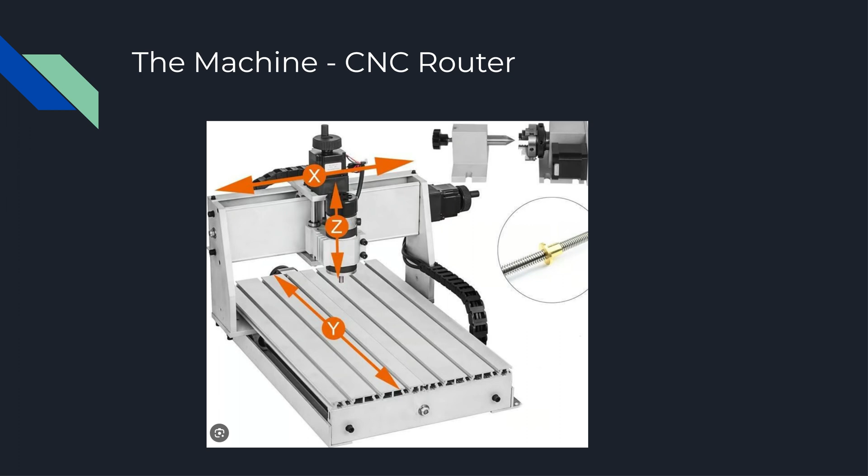We use our Shapeoko CNC routers for a lot of training purposes, as they're easy to use, durable, and relatively robust, and they can work with material up to 23 by 18 inches. We even have the large CNC router, which will work with material up to 4 by 8 feet, as well as various other metal types of mills that are more rigid for cutting harder metals like steels.

Now, for tooling that goes into these machines, the one you're most commonly familiar with is probably known as a drill bit. You probably have used these in drill presses and hand drills. Drill bits are great for making holes, but they're only meant to make holes. They can only be used in up and down cutting motions, and to be absolutely frank, we don't often use them in our routers due to the limited Z travel a router has, and the fact that you can usually get away with just using an end mill.

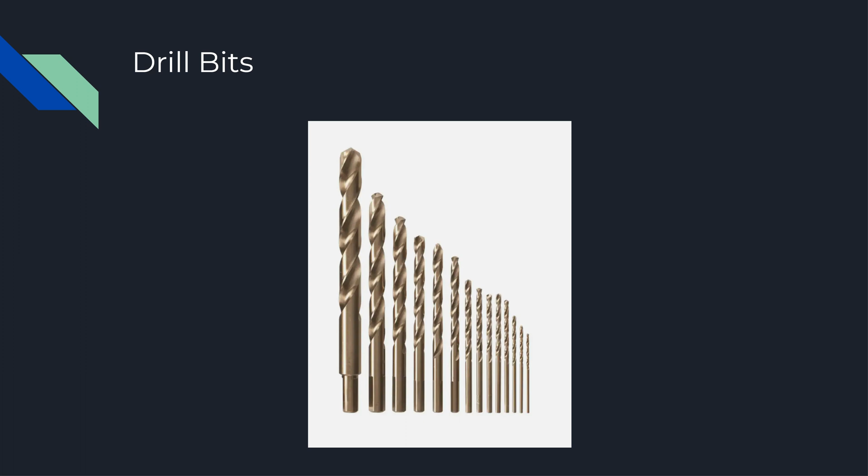And without further ado, end mills are the bread and butter of machining. These are tools that can cut on the sides as well as the bottom face. Now, with end mills, you don't actually want to drill straight down with them. You generally use the CNC machine to make a helical move that bores into your part. Afterwards, the end mill can be pushed around and then used as a side cutting tool.

Now, end mills come in all kinds of different shapes, diameters, and lengths. The most common ones are probably these square tipped ones, where the end cutting flute is perpendicular to the sides. We generally have these in 2, 4, 6, and 8 millimeter cutting tools, and they're generally used for all kinds of different types of cutting. Now, the other most common type are known as ball end mills. These end mills have a half sphere tip and are generally used for 3D surfacing and creating complicated geometrical shapes.

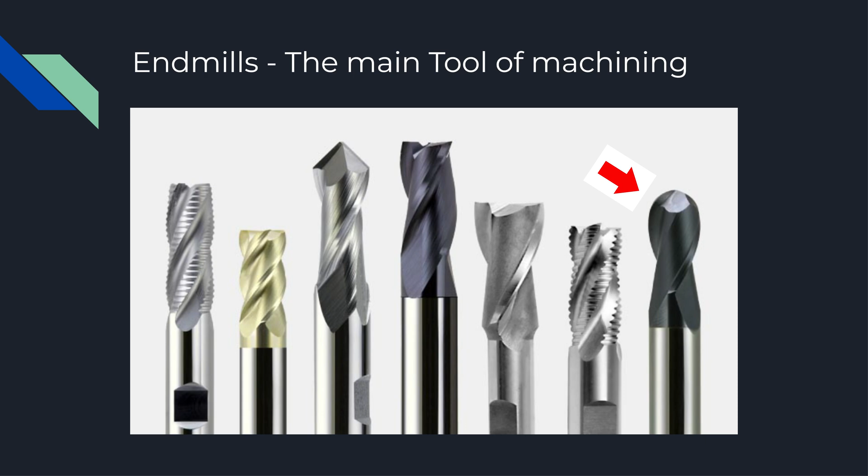Now, when you're designing your parts, you gotta think a little about how you're gonna design the part so that the machine can make it. Unlike a 3D printer, the CNC mill can only cut what the tool can fit in. So that means that when you design a pocket, you have to have an end mill that is small enough to physically fit into the pocket to be able to cut it. You also have to have an end mill that is long enough to cut it.

Most commonly, our end mills will only cut up to an inch deep. So if you need to cut a pocket deeper than that, you're going to have to get creative with the tool path or buy a larger tool. Now, you can usually solve most of these problems with money. Tools that are not of standard length or sizes get very expensive very quickly. Also, when you're cutting a pocket, you cannot have any sharp corners, because the end mill is round, so all of your corners at minimum will have a radius of the tool size.

You also want to think about the rigidity of the tool, as there's a lot of cutting forces and part of the tool is cutting through different materials. Because everything moves under high load, you want to make sure you're using the shortest end mill for your cut, and then you also got to realize that the smaller end mills are much more likely to break.

I've used end mills as small as 0.5 millimeter, and they snap if you look at them wrong. So for the most part, you want to make your part so that you can use a 6 millimeter or bigger end mill. We find those to be fairly durable. Anything smaller than that, you have to start being really careful with your fixturing and your tool pathing to make sure you don't break the smaller tools.

As you're designing your parts, you also have to think about how you're going to fix your part, since you have to hold it down somehow. There are a lot of different ways to do this, involving anything from double-sided tape to super glue, all the way up to custom fixturing, clamps, and everything in between.

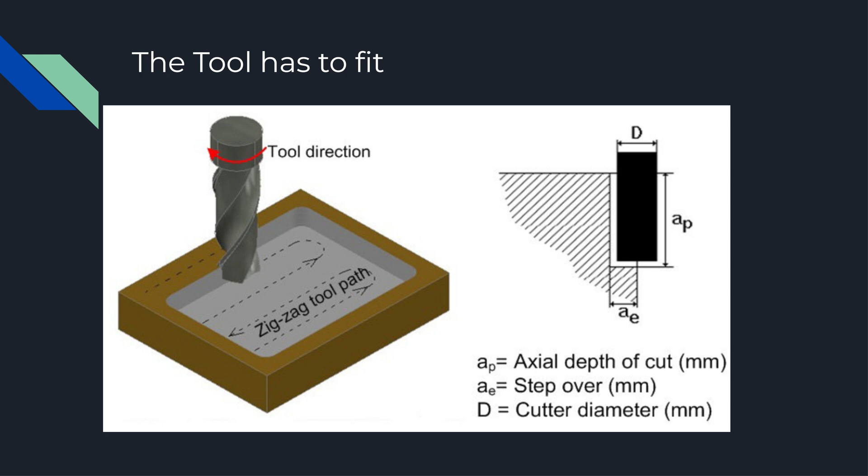Now let's talk about the software that we need to be able to do this. For the most part, you're going to need a 3D model. This can be designed in a large range of CAD software, which stands for computer-aided design, such as Fusion 360, SolidWorks, Onshape, Creo, and more.

Now, the CAM software, which stands for computer-aided manufacturing, is software that takes a 3D model and converts it into a G-code file for you to use on the CNC mill. You've probably heard of slicing for 3D printers. This is similar to that, however this process is a lot more manual and requires a lot more input from you, the user.

Some of the slicer software that we use in the shop include VCarve, which we often use for our routers and large format jobs. SOLIDWORKS HSM for SOLIDWORKS users, as it is a plugin that works natively with SOLIDWORKS. And then for most other applications, we recommend Fusion 360, as it is good general purpose CAM software and CAD software that runs on Windows and Macintosh computers.

Today we're going to be talking about Fusion 360, as again it is probably one of the best general purpose softwares, and you can import files into Fusion 360 from all the other CAD softwares I talked about.

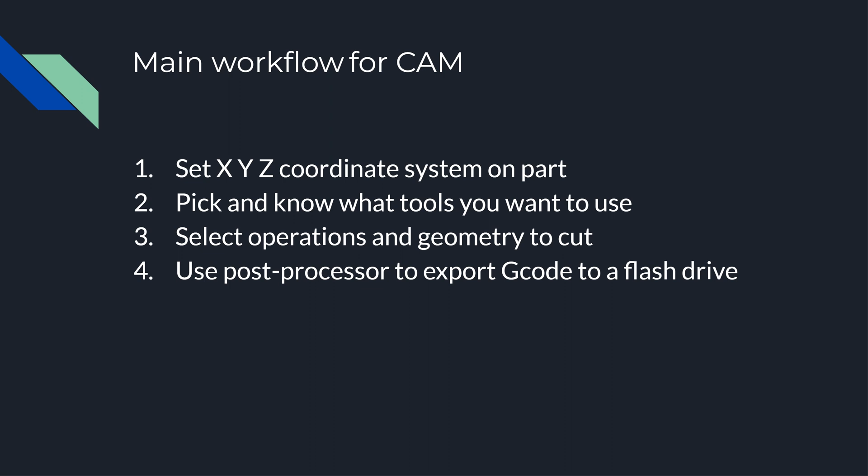So the main workflow of the CAM software involves: number one, setting up the XYZ coordinate system, also known as our work coordinate system, for the software and the machine to interpret. You're going to want to pick and choose what tools you're going to use to do your cuts. Then we're going to go through and select the operations, and the geometry we're going to cut with those operations. And then we're going to use a post-processor to export the G-code to a flash drive to take over to our CNC machine. So let's get over to Fusion 360 and get started.

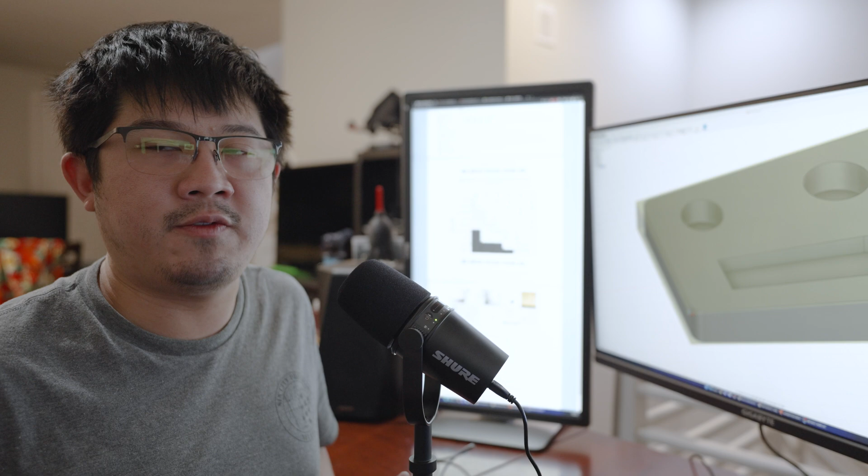So this is going to be a really simple, really basic intro into CNC programming. You're going to be able to make this on any of our Shapeoko CNC routers, and this is going to give you the foundation to build up your skills in CNC machining. So let's go ahead and jump into Fusion and get to it.

In Fusion, CAM is known as the manufacturing tab. So the first thing you want to do is click this left drop-down menu and go into manufacture. This will bring up your CAM tools. Now, for Fusion CAM and most other CAM softwares, every face you want to machine has to be its own setup. So the first thing we're going to do is create a setup for the face we want to machine, which on this part is just going to be the top face, so we'll have only one setup.

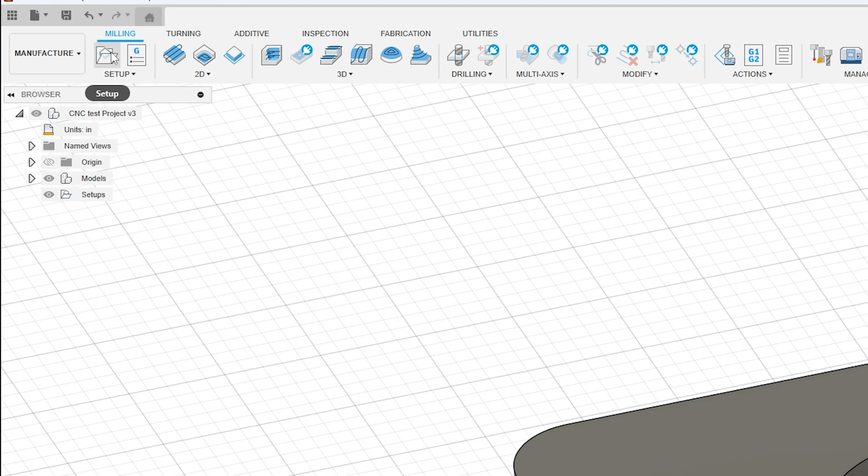You're going to create your setup by clicking this folder icon, and it's going to bring up the setup menu. For us, there are two main things we have to do in the setup menu: set the work coordinate system that tells the machine where our X, Y, and Z zero is, and set up the stock so the machine knows how much material we have.

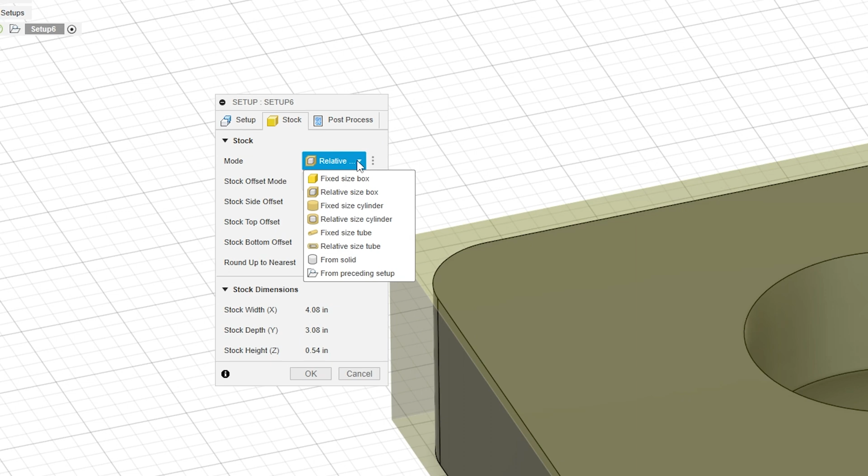So now the first thing we're going to want to do is go ahead and set up the stock. We're going to click that, and go into Fixed Size Box. This allows us to measure our stock and tell Fusion how big the piece actually is. So that's what I'm going to do right now, measure my stock with a pair of calipers.

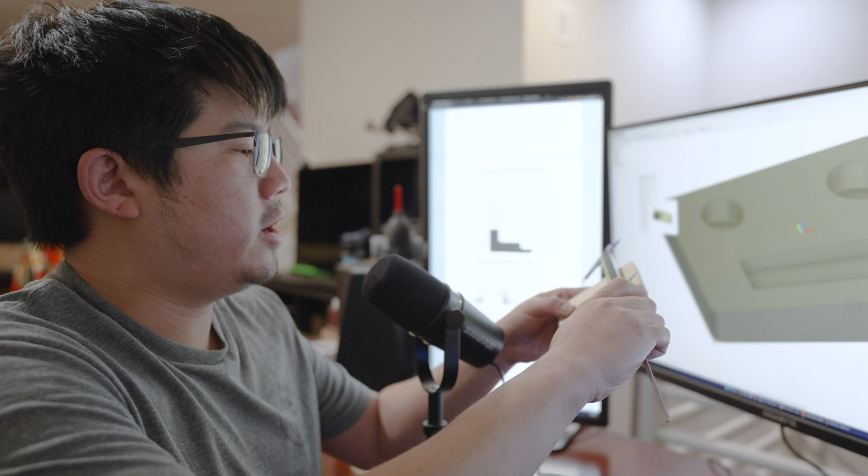So we got 4.06 on the x-axis, and on the y-axis we got 3.22.

Now, Fusion is telling us the model is 4 by 3 inches, so that means our stock size obviously has to be bigger. And when you cut your stock out on the bandsaw or chop saw, you always want to give yourself a little wiggle room.

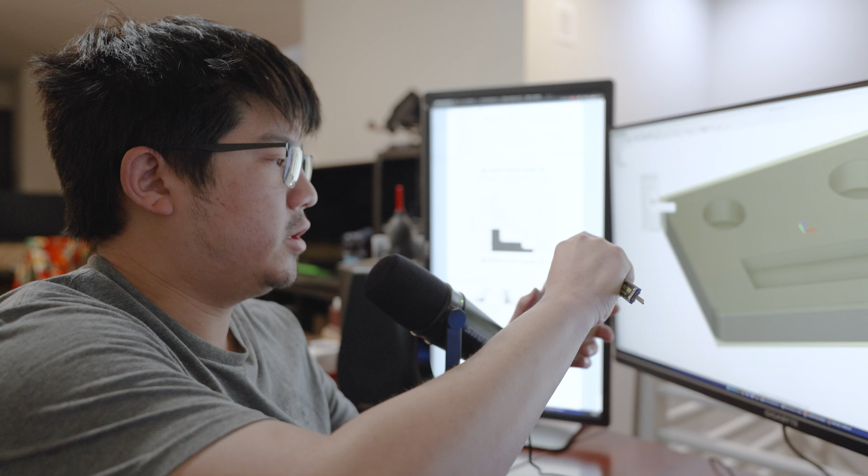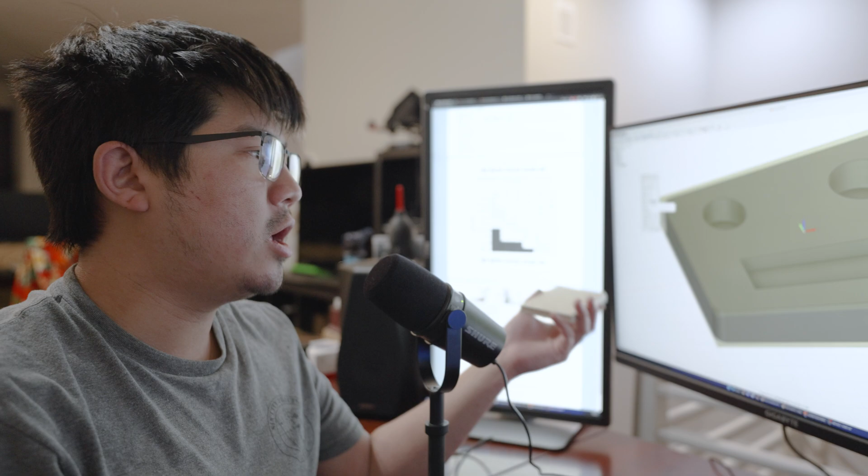Now, for the z-axis, our model is 1/2 inch, because that's our nominal thickness, but the plywood I have is actually measuring 0.47 inches. We're going to manually deal with this later on, but you still do want to know how thick the material is, so you make sure that you cut all the way through and you don't cut into the machine's table too much.

After we set our stock size, we're going to go into setup, and now we can set our XYZ coordinate system, which is also known as our work coordinate system.

By default, it looks like Fusion has put it in the middle. We're going to put it into this left corner by clicking this little white dot, so that's going to be easier for us to set up the machine with.

As you can see, we already have it in the right orientation. We've got the x-axis going along the long edge, the y-axis going along the short edge, and the z-axis going up and down parallel to the features we want to cut. That's key and super important, as Fusion will only let you cut into features that are parallel with the z-axis.

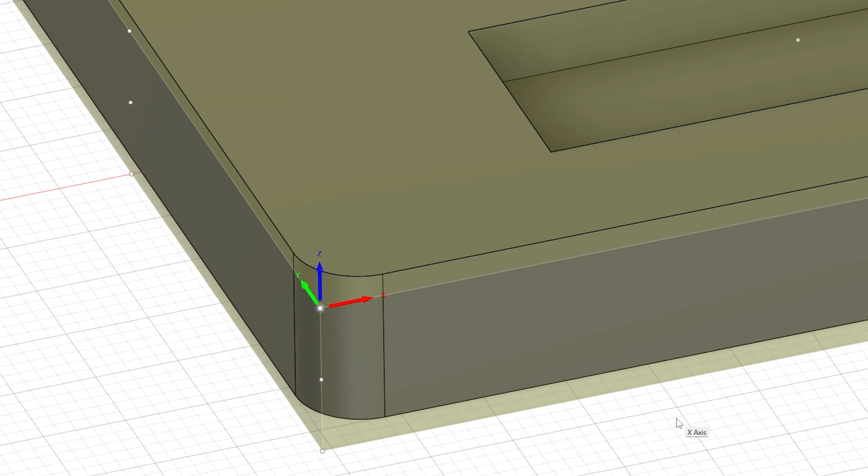Now, we also want to make sure we have the z-axis on the top of our part, which we do. That's going to make setting our tool zero really easy down the road, and overall that's going to be the easiest way to zero the part and our machine.

Now, if you're doing something more complicated, you might want to put the origin on a different corner, or sometimes in the center of a feature. For something like this, where we're just cutting flat pieces of wood on our CNC router, you can pick almost any corner, and as long as you remember which corner you picked in the CAM software and do so on the machine, you'll be fine.

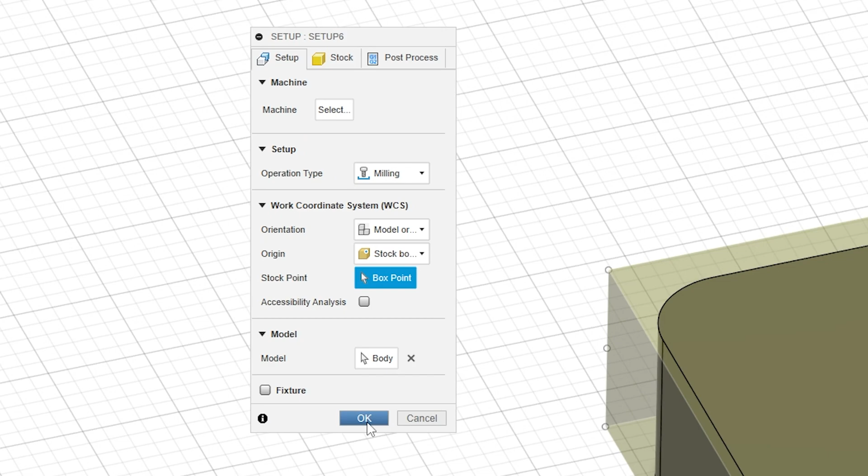After we do all of that, we're going to hit OK, and we're going to be ready to go. Now, to recap real quick, the setup is for setting the work coordinate system and the stock size. And when you set the stock size, you do want to actually use a pair of calipers and measure it.

Okay, once we have set up our setup, we're now going to be able to create our operations to actually start cutting into our material.

Now, in Fusion, we have 2D toolpaths and 3D toolpaths. 2D toolpaths are generally considered 2.5D, meaning it can cut parallel to the Z-axis using lines to drive the cutting toolpaths. As you can see, our part is a complete 2.5D operation. We have different depths which we can control, but everything we need to cut is simply a 2D sketch.

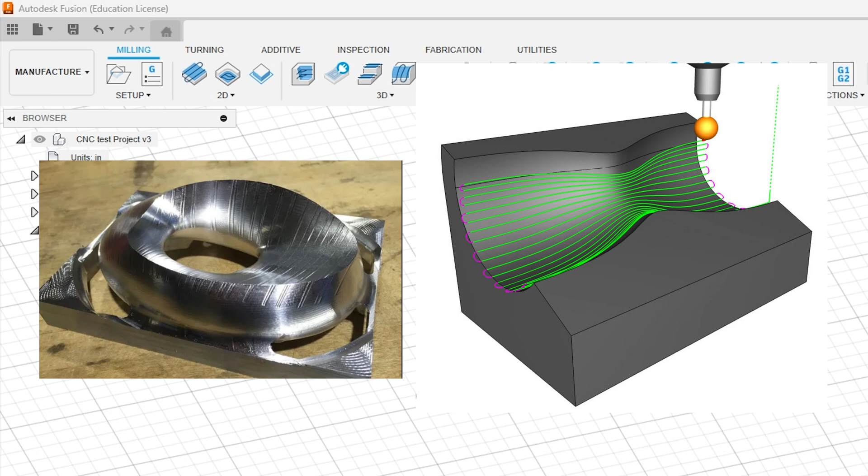Now, 3D toolpaths generally involve more complicated geometry, where you have more 3D surfacing actually driving the toolpaths, such as trying to cut a sphere. That's going to be a little out of scope of the video today, so we're not going to really talk about that, but we will show you some examples of 3D toolpaths on the screen right now.

Now, one of the most powerful 2D toolpaths is known as 2D adaptive clearing. This is a smart toolpath that does its best to remove material as quickly and efficiently from your part on any type of machine.

So that's what we're going to use to cut out these circles as well as this pocket right here. You can also do things like profile and 2D pocket, which are more manual toolpaths that will allow you to do the same thing, but you're going to have more steps and more setup required to do so.

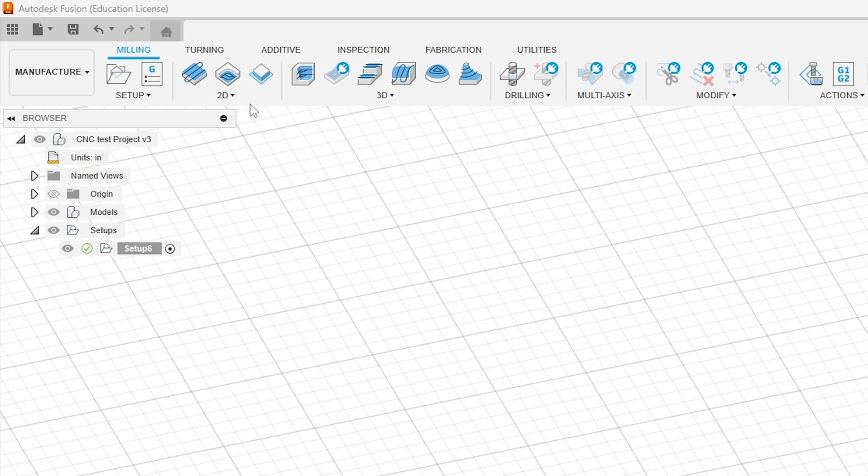To start off with a 2D adaptive, we're going to click the 2D button and select 2D adaptive clearing. That's going to bring up our menu screen for selecting the toolpaths. Fusion tries to make all of its menus look the same, so it's easy for you as the user to use them. All of the toolpaths will have a very similar menu to what we're about to go through: the first page, you select a tool; the second page, you select a geometry; the third page, you select the heights; the fourth page, you select your cutting parameters, and so on.

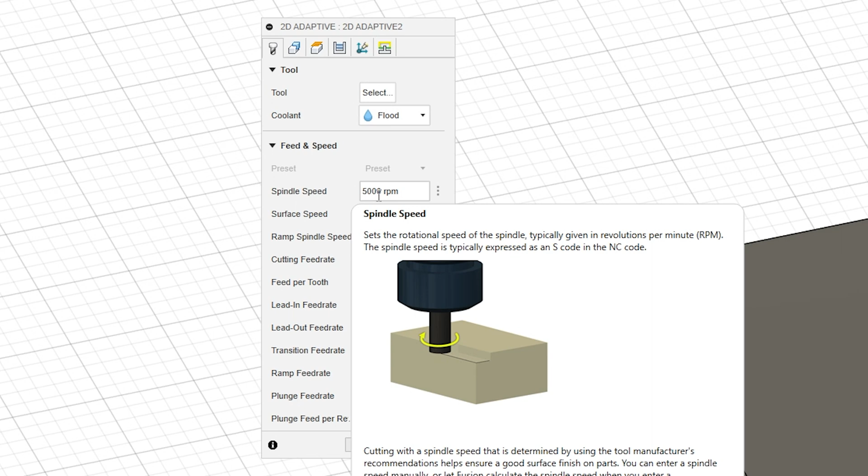Now, we're going to see a lot of boxes and a lot of numbers while doing this. Some of these numbers are very important, where if you misplace a decimal point, you could crash the machine, break something, and scrap your part, while some of these other numbers in years of machining I've never touched. So until you fully understand which numbers do what, you want to be really careful that you have set everything up correctly. If you're ever confused about a number, you can mouse over the field and a tooltip will come up that explains what that field does, often with a graphic to help you understand. If you're ever confused about anything, feel free to talk to a staff member and we'll do our best to help you out.

As I said earlier, the first page is selecting the tool. So we're going to hit select and go into our test project, and you'll see we have a 6mm end mill already loaded up. We're going to hit select. Now this is going to pull up a default feeds and speeds that I've already set.

We're not going to get too in-depth into feeds and speeds, but there are two things I want to touch on: number one, that is your surface speed, and number two, that is your chip load, or your feed per tooth. Surface speed is the speed difference between the cutting tool and the surface of the workpiece it is operating on, and that is driven by the tool diameter as well as the RPM of the spindle speed.

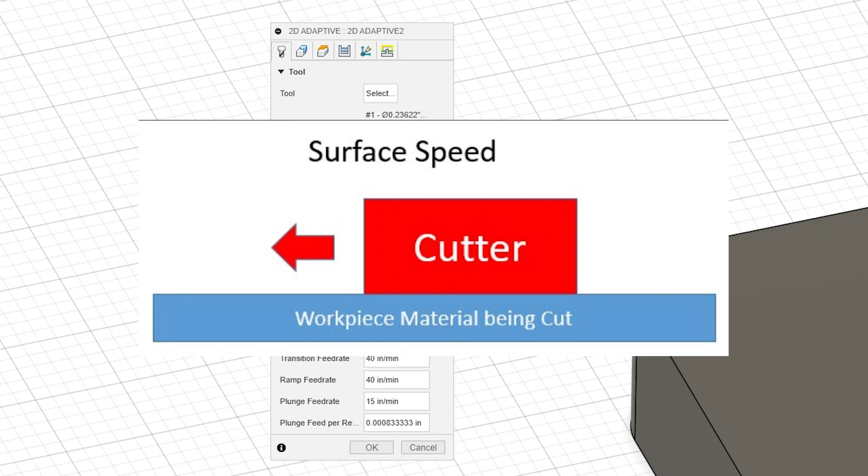Different materials have different surface speeds. For wood routing, we're often in the thousands. We're also going to be limited by our machine and its maximum RPM, rigidity, and so on. There's a lot of complicated math you can use to calculate these numbers, as well as manufacturer guidelines when you buy tools and machine tools. These are numbers we personally have tested, so we know they work, and it's a good starting point for you getting going with your part.

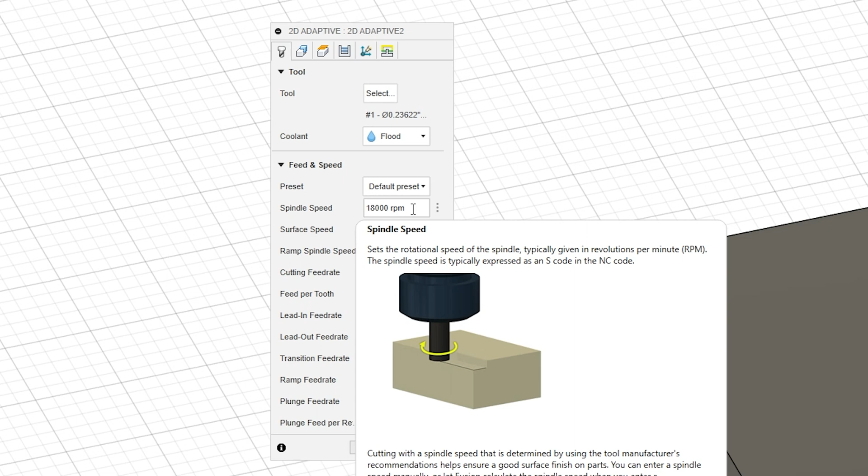So for surface speed, we see we have 1100 keyed in, which gives us a spindle speed of 18,000 RPMs with a 6mm tool. Now, feed per tooth is how big of a chip the tool is cutting. This tool has two flutes, which means it has two cutting teeth, so for every revolution of the tool, it is taking 2 cuts. We want each of those cuts to be around 1/1000th of an inch, which is why it's set to 0.001, and that gives us a cutting feed of 40 inches per minute. Like I said, this gets fairly complicated, but that's just a starting point for you to understand what's going on here.

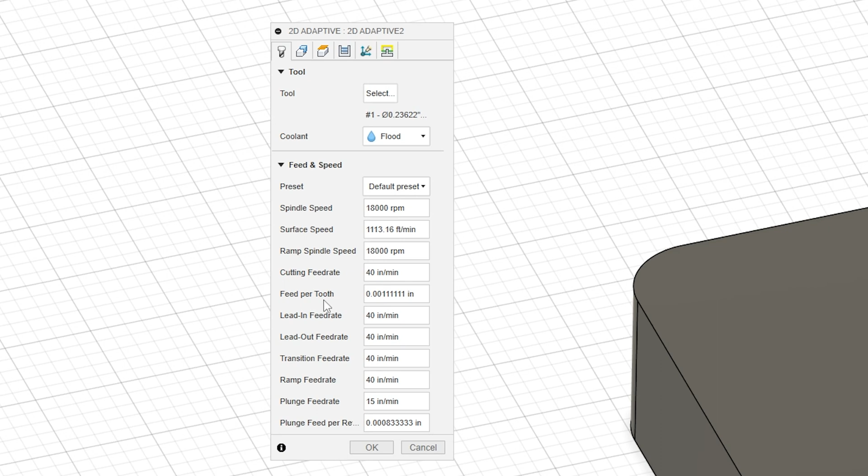So next, we're going to go on to our geometry tab. In this tab, we're going to select what geometries you want to cut. I'm going to select these 2 bores first, and I want to select the bottom contour of the bore, and you'll see why in a second. So I'm going to go ahead and do that, and we also want to select the bottom contour of this pocket.

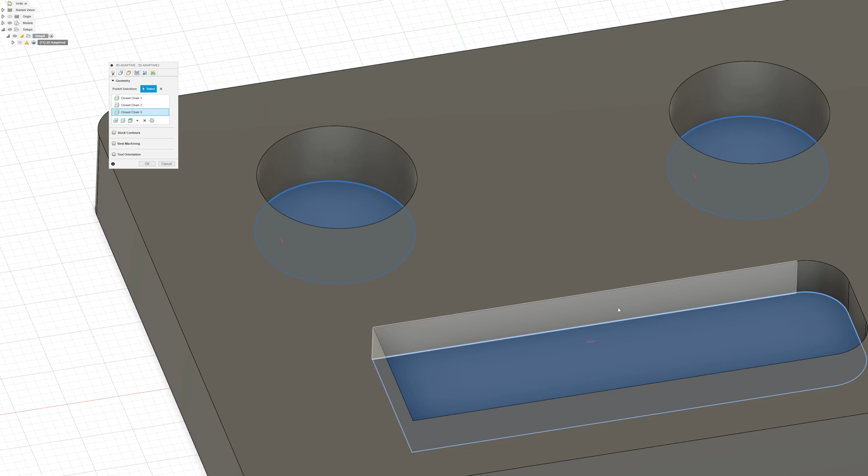When you zoom in, you'll notice that each selection has a little red arrow. The red arrow dictates what side of the line you're going to be cutting on. So these are pockets, we want the arrow to be on the inside of all of these features, which you can see here that's all correct, so I'm going to be happy with that.

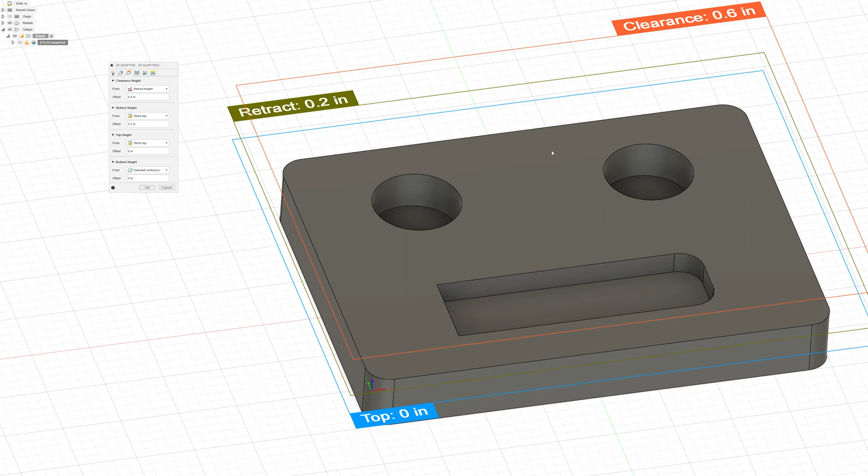Next, we have our Heights tab. This controls where our tool starts, ends, and where it goes in between cuts. The clearance height is where the tool starts and ends, set to 0.6 inches by default. The retract height is set to 0.2 inches, which is how high the tool retracts when moving from one feature to the next. The top is set to 0 inches, which is our Z0.

Obviously you want the retract and clearance height to be above the part, so I'm going to leave those as is. If you have screw heads or clamps on the top surface of the part, you might have to increase those numbers to make sure your tool doesn't hit anything when traversing the part.

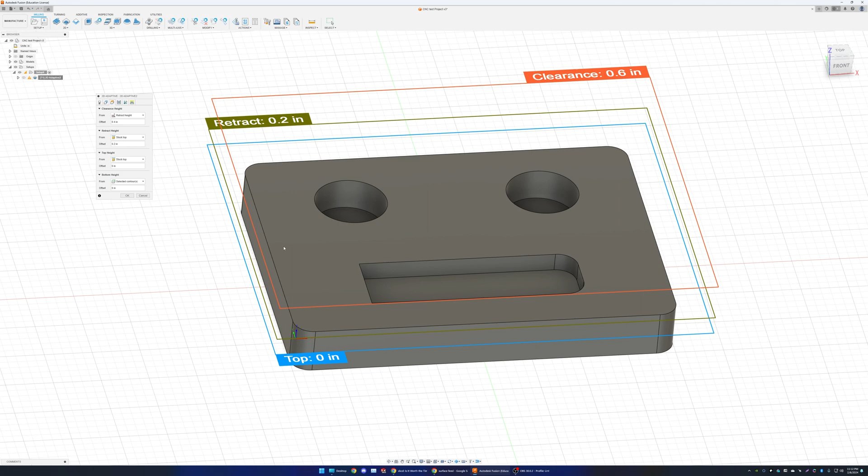For the top, that's set to stock top, which is our Z0, which is fine. Our bottom height is defaulted to selected contours, and that's why we selected the bottoms of the contours earlier—now Fusion will simply use our geometry to determine how deep to cut in all of our features. That's going to work out nicely for us.

Next is our Passes tab, which sets our cutting parameters for the tool. A couple things to pay attention to—we'll start with the optimal load, which is how big of a cut the tool takes. We're going to change that to 0.1 inches, roughly half the diameter of our 6mm tool, which is generally a good starting point for a lot of wood cutting applications.

Next, there's a stock to leave option, and we're going to uncheck that, because if left checked, it's going to leave this amount of material on all of our features, which we don't want in this case.

For some examples of why you might want to use this feature—if you're doing metal cutting, you generally want to leave a bit of material to then come back with a contour toolpath for a finish pass, which gives you a better surface finish. For wood cutting, I find the finish pass isn't really necessary, as you're not going to get a better surface finish, so we're not going to spend the time doing so.

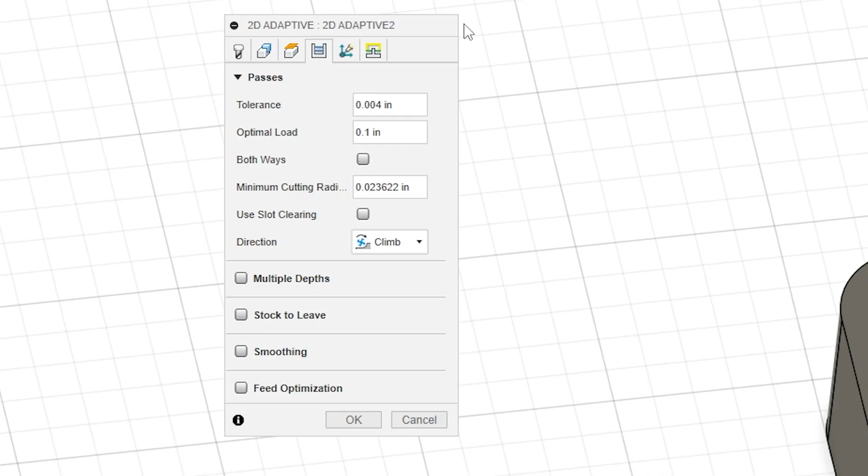After that, we can go into our multi-axis, which simply tells the computer we have a 3-axis machine, which all of our routers are. In the last tab, we have the linking parameters.

What this does is our leads in and lead out. When our tool starts cutting, we're going to use a helical spiral that ramps into the material, and then we'll have a small arc to lead out of the material when we're done cutting.

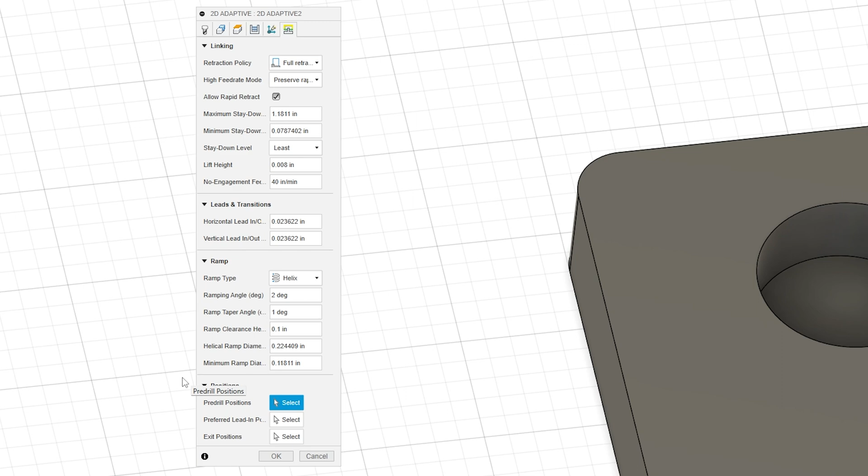These default numbers on my screen will work fine. You just want to double check you have the same numbers as I do, but for the most part, Fusion's default for this will work. We hit OK, and now the computer generates our toolpath. As you can see, it just did, and it looks like everything is good to go.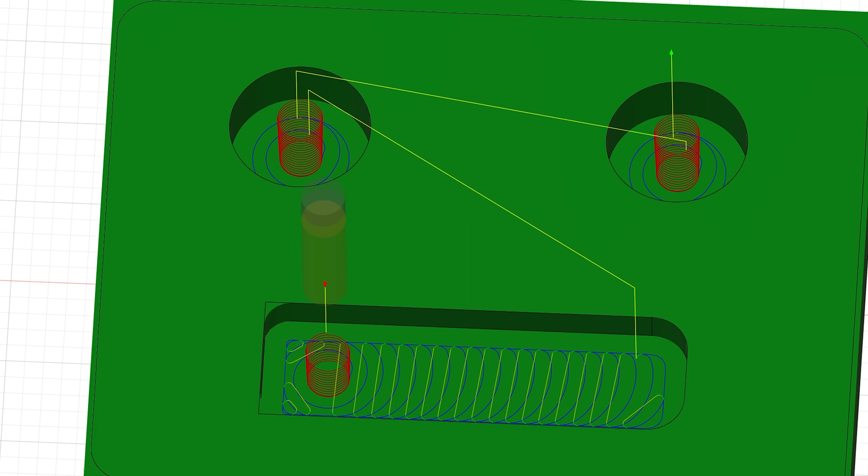The yellow lines are our retract and move commands, where the tool wraps around the part. The red lines are the helical bores that enter our part, and the blue lines are our cutting toolpaths. This green preview shows what the toolpath is going to do, so you can see it cut 2 circles and my pocket out. I don't see any excess material removal, so it looks like we've done everything correctly.

Now you can see our square corners are actually rounded over. Fusion tries to be smart and crams a tool into the corner as tight as it can go, but you will still get a radius where you have sharp corners. You want to again double check on your screen that you see the same thing. If you see any gouges or additional material being removed, you've probably done something wrong and need to go back and double check your work.

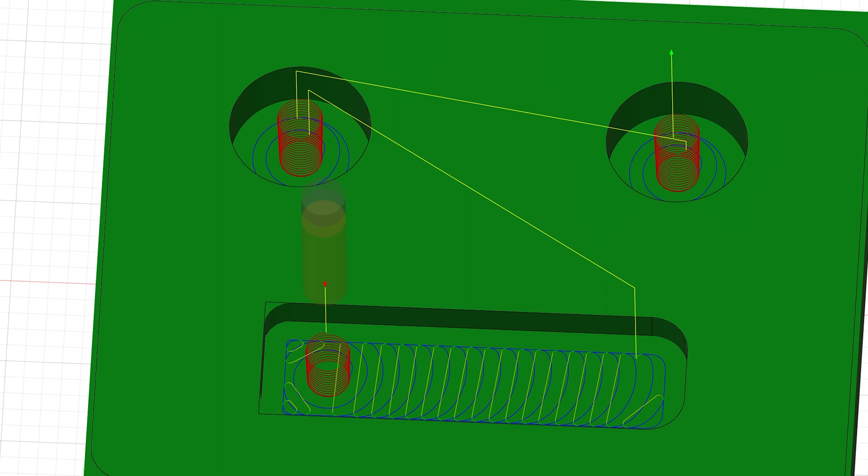After we've done our 2D adaptive, the next thing we're going to do is a 2D contour around the outside of our part. This is going to bring our part to size as well as radius our corners.

For the 2D contour, we're going to select 2D contour. We'll get our selection menu, which looks very similar to the 2D adaptive one. On the first tab, we have our tool. Fusion is going to automatically load the same tool we used from our last operation, with all the same feeds and speeds, so that all looks good and we can just go on.

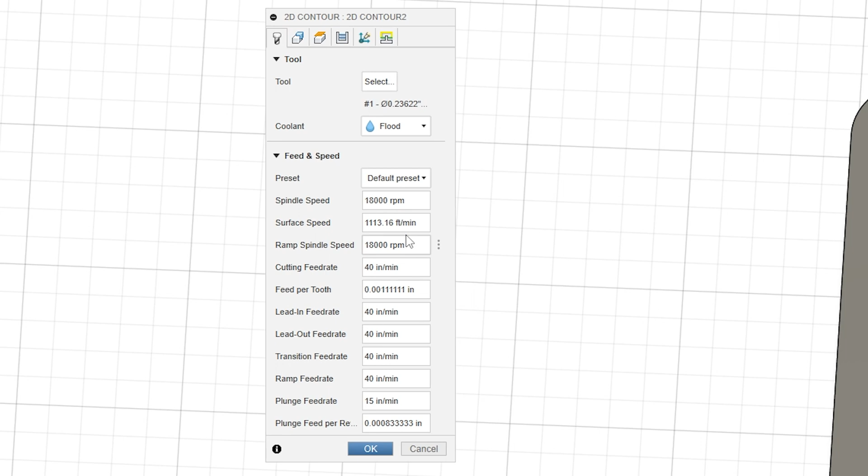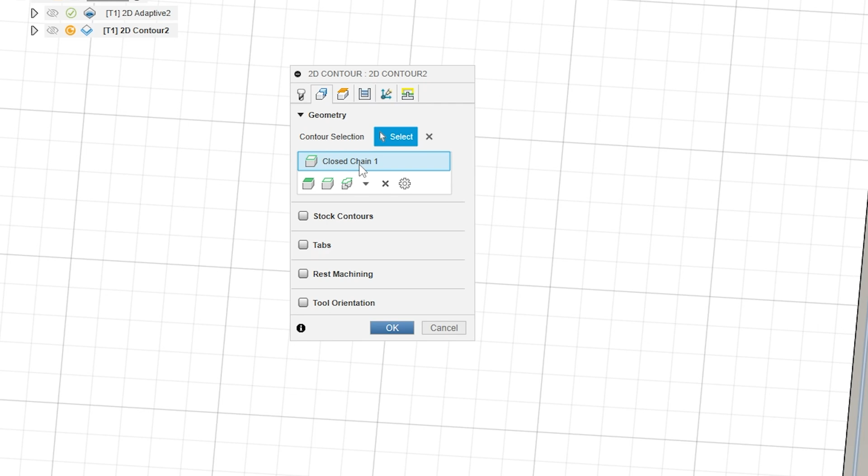The next tab is the geometry. Again, we're going to select the bottom of the outside contour, and you'll see this red arrow. Because we're cutting on the outside of this line, we want to make sure the red arrow is on the outside, which it is by default, so we can move on. If your arrow doesn't show on the outside, right-click the chain, hit Edit, and select Reverse. I don't need to do that, so I'm not going to.

Next, we go back to our Heights tab. You can see we have the same clearance and retract height, which are above our part. We also have a feed height, which is where the tool starts ramping into our part, set by default to 0.2 inches — I'll leave that as is. And we have our top plane, set to our Z0, which is 0 inches. That's perfect, so we'll leave that as is.

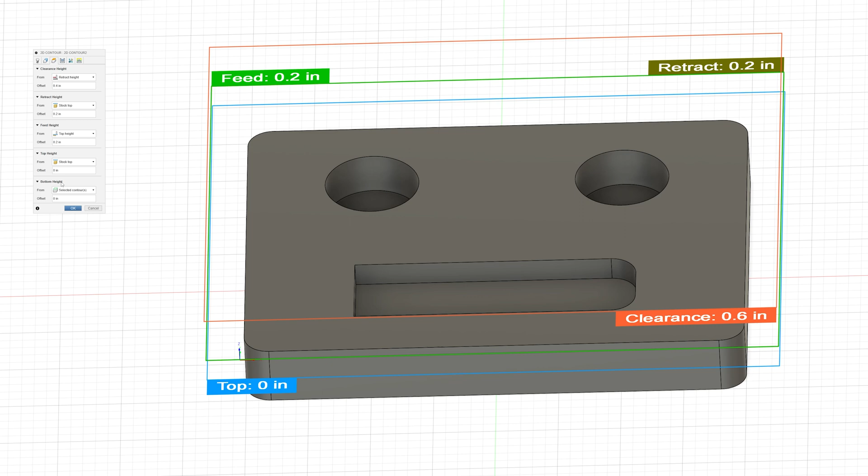Then we look at our bottom height, which is from selected contours. You may remember our stock material wasn't exactly half an inch, while our model is exactly half an inch. So we want to change this to model top, and go negative 0.47, which is how thick our material is. Then, to ensure we cut through our material, we'll add a bit more — 20 thousandths of an inch — so we'll go negative 0.49.

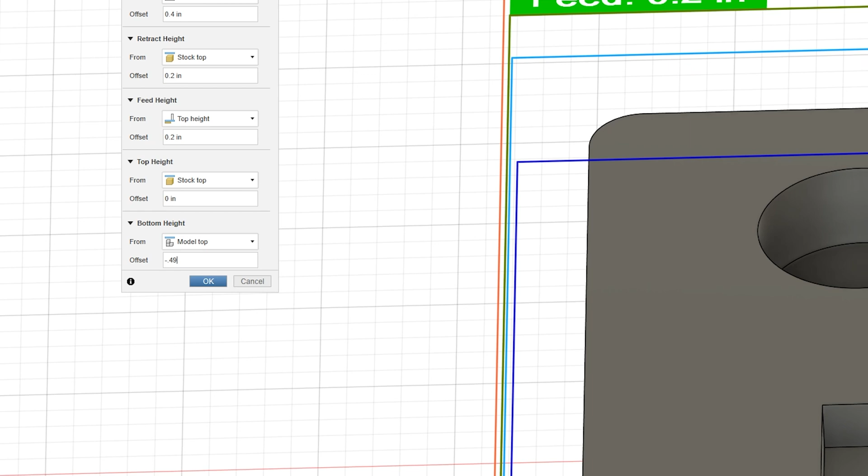This ensures we cut through our part without cutting too much into the spoil board on our machine — the sacrificial wood you bolt your part to so you can cut through it. Now it shows our bottom is negative 0.49 from the top, meaning the tool will cut 0.49 inches below the 0 surface, just slightly above the thickness of our part, so we're good to go. You always want to take a real measurement and double check this number, as it's critical to make sure you cut through your part, but at the same time you don't want to cut too deep, damaging your machine and cutters.

After that, we go to the next tab, which sets our passes. The only thing we really want to adjust here is multiple depths. We'll click that and set the maximum roughing step down to 0.25 inches. This means the tool will only cut 0.25 inches deep at a time, so we don't overload the tool or the machine. In our testing, we find a quarter inch is about what you want to use for this number.

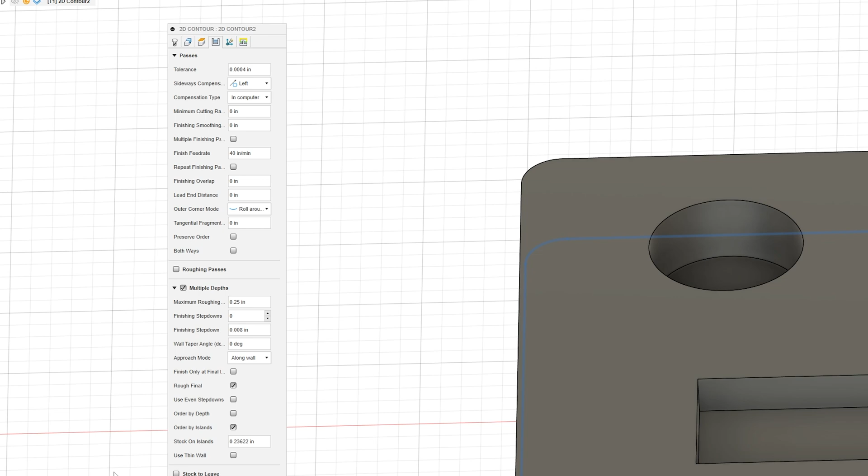I'm going to leave all the other variables as is, since I know the defaults will work. You'll want to take a close look at your screen and my screen to make sure we're on the same page. There are other options like finish passes you can enable in these 2D contour toolpaths, which might be useful when cutting metal or harder plastics, but for wood I don't find them necessary, so we'll leave them as is. We also want to make sure stock to leave is unchecked, since I don't want to leave any stock. Then we move on to the next tab, multi-axis — 3-axis is perfectly fine.

Then linking, where we'll enable our ramp. This will ramp into our part, and we'll leave it at the default 2 degrees, as that's going to be a very nice, gentle ramp.

And the lead in and lead out defaults will work for this as well.

The more experienced you get, the more you can push the machines in these settings. These are all fairly conservative, and more experienced users might get a little more speed and optimization out of these toolpaths. However, sometimes it's not worth the effort to save a minute or two when you're potentially risking the machine or the tool breaking. So we're going to run really conservatively for this part.

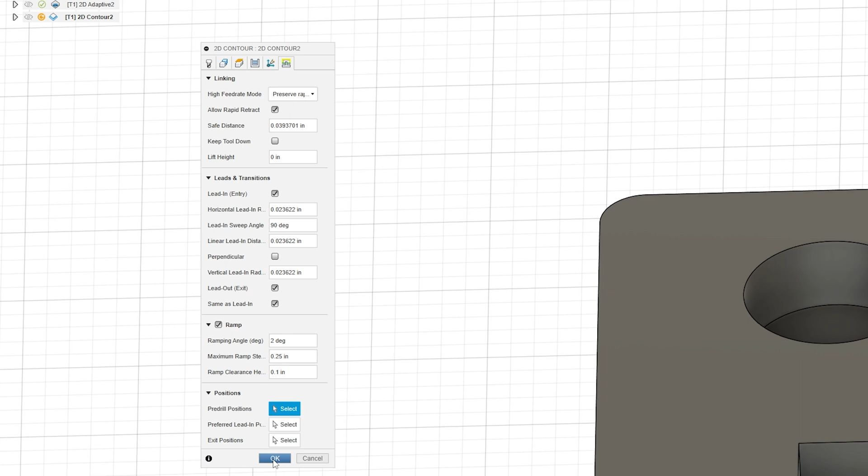We're going to hit OK, and now Fusion will generate our 2D contour. As you can see, the tool will now be contouring around the outside of our part. We got our red lines for our ramps, blue lines for our cutting, and yellow lines for our retracts and lead-ins and lead-outs. That all looks really good.

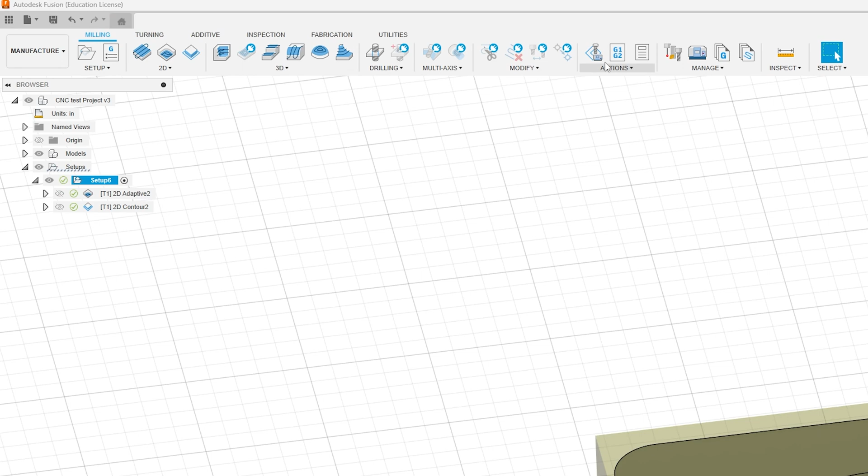Once we're happy with that, we can click the setup and then click the simulate with machine option here in the actions tab, and that will pull up this simulation view where we can click play, and we'll simulate our entire operation.

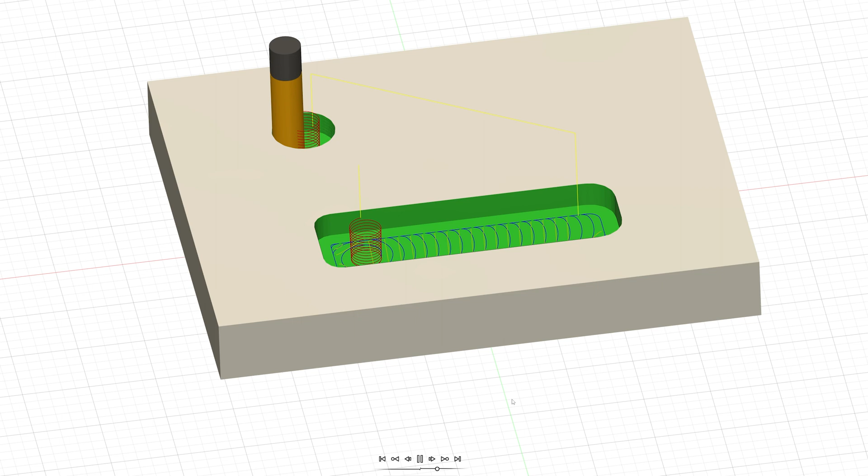When we're watching this, we want to make sure we're watching for where the tool is going, that it isn't going anywhere we don't want it to, or causing any gouges in our parts. Over here in the statistics tab, you can click that and it will give you an estimated runtime of how long this is going to take. According to this, it's going to take 3 minutes and 33 seconds, so that's fairly quick. You always want to do this to make sure your tool is cutting what you want to cut, and you also know how long it's going to take so you can budget your time in the makerspace accordingly.

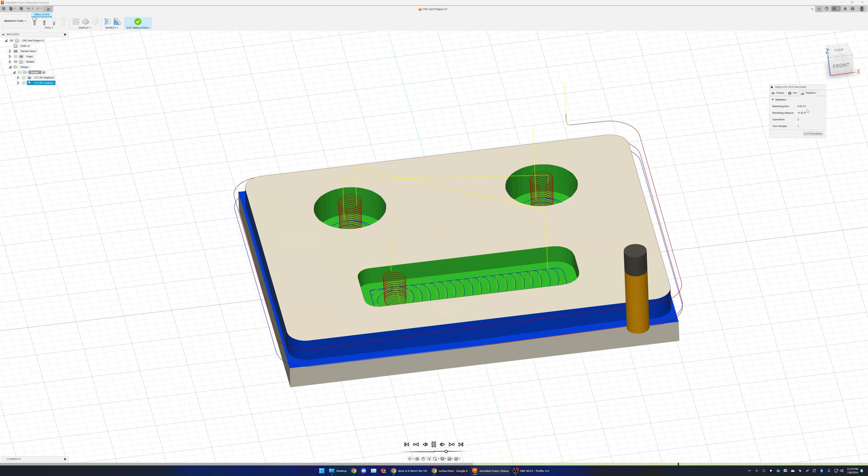Now this is cutting. Let me tell you about today's sponsor. Hint, we don't have one.

After that's all done, we're going to hit exit simulation, and now we're able to post-process our G-code. Post-processing is the process of exporting the G-code from the CAM software that we're going to put on a USB drive and take over to a machine. It's basically the same thing as what's known as slicing in the 3D printing world.

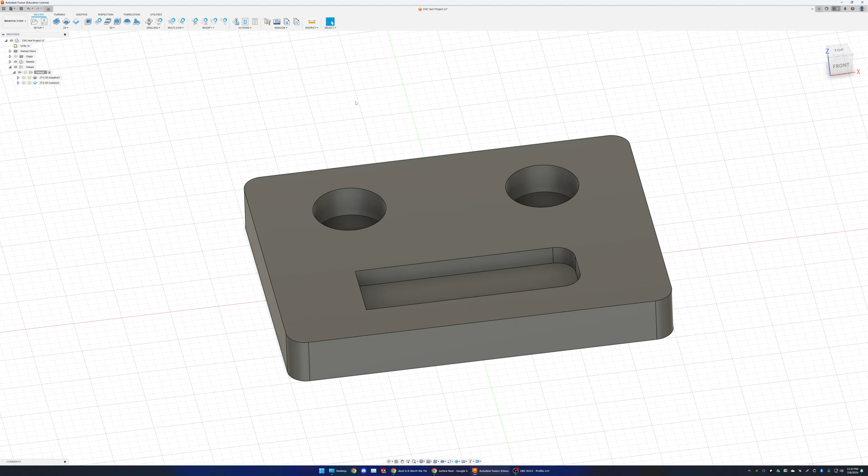So to do so, we're going to right-click our setup and hit post-process. Now, what this will do is post-process all of the operations in our setup, so it's going to combine these two operations into one file.

Personally, when I'm using different tools on a router, I'll often post-process operations in batches, so I'll have one file for every tool I need to run so I know to do my tool changes. That's a popular way of doing it. You can also post-process every operation as an individual file if you want to run them sequentially, in case something goes wrong and you need to go back and change something. But because this is only one tool and a relatively simple part, I'm just going to post-process everything as one file.

In the post, you're going to want to select the Carbide 3D post processor. This is what we're going to use for our Shapeoko CNC routers. Every CNC manufacturer does their post-processing and G-coding a little different, so you want to make sure you use the right one for your machine. Now, if you don't have this option in your computer yet, you're going to want to go choose from library, select the Carbide 3D one, and then copy it to your local library, and then you'll have it as an option.

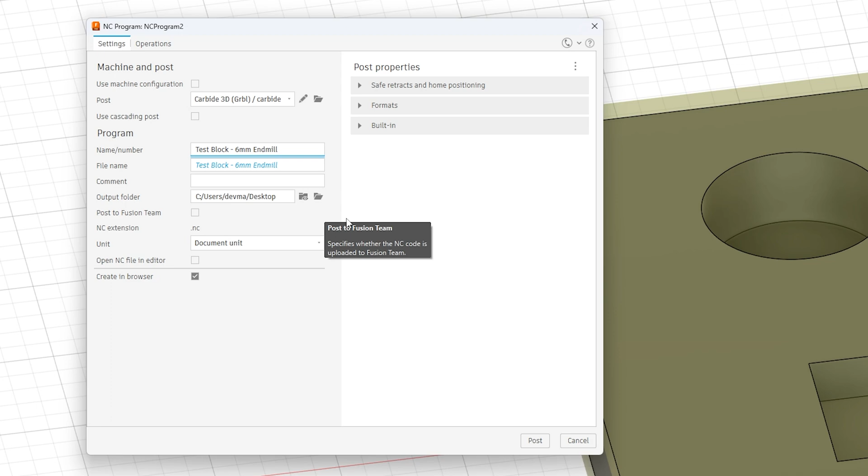We're going to name this part something we can read and find again, so call this test block. And then I like to put the tool I'm using inside the file name, so I'm going to do -6mm end mill. This way, when I'm loading the file, I can have a visual reminder of what tool I need. And we're going to go ahead and save it to your flash drive. I'm just going to put it on my desktop personally for now, and hit post.

Once the code is post-processed, you're going to be able to take the flash drive and take it over to the machine and then start setting up the machine and running your program. Again, if you have any questions, feel free to reach out to a staff member. We'll do our best to help you out with this, and hopefully you've learned something today.